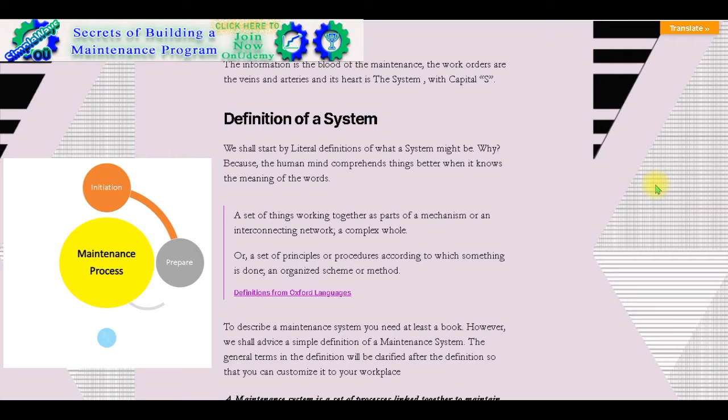That's a system. Also, if we have some procedures that work together to produce an output, they generate a scheme together. So these processes or procedures are called a system. That's the literal definition of the system. So what about the maintenance system? The maintenance system is actually a set of processes. They work together to maintain the equipment with high availability, to work within the designed context, to produce the intended product with accepted quality.

So to understand all this, we need to go through it one by one. Processes: in maintenance we have a lot of processes. For example, we have the initiation process, which is very important. The initiation process is followed by a verification, then the preparation process, followed by the execution process. And after the execution process, we need to give some feedback that helps us in the next initiation. So that's a complete cycle, a complete flow of the blood of information through the maintenance system.

After that, we are speaking about the high availability. In the previous chat, we had spoken about the OEE, or overall equipment effectiveness. It's very important to understand that the availability, or the timeline of the availability, is very important to make the equipment available in a condition to produce the intended targets.

So within the design context: the temperature, the pressure, the speed, the liquids you are using, the utilities you are using, everything should be within the limits of the design. So it's working within the design context. That's the context of any machine: the utility supplies to it, the speed, the greasing, the maintenance. So the maintenance is working to guarantee this context for the equipment to work healthy.

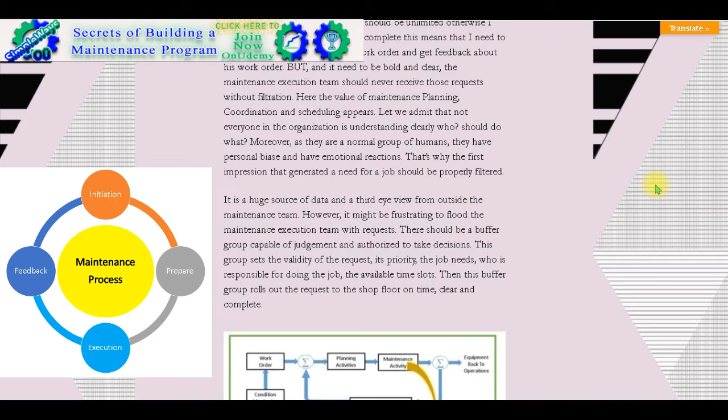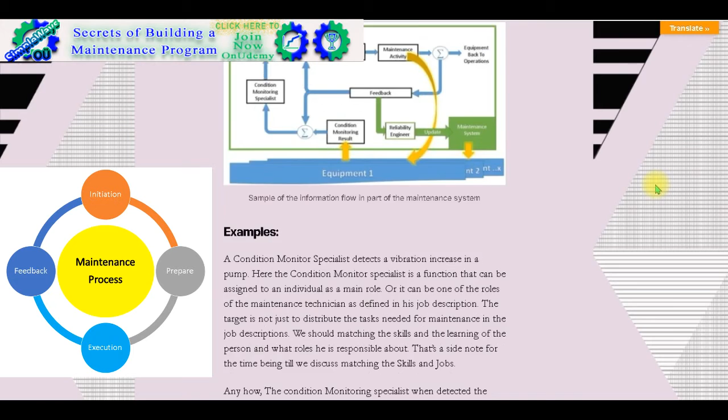Okay, so the initiation is a very important part of our maintenance process, and it's like it pumps the blood inside the maintenance system. And pumping the blood inside the maintenance system can come with a work request, can come with whatever, how you initiate your system. It's coming from the system, coming from a work request, or from an external or from the production, from the operations, from the inspector, the condition monitor. So we can take this example that the condition monitoring specialist, as we said, can be not one person. It can be just a function done by one of the maintenance team or one of the operations team, however you are arranging your system.

And he found that one pump is having a high vibration, or one motor is having a high vibration. Based on his experience and his analysis and his readings, he found that the bearing, or there's a problem with the alignment. So he initiates a request to change the bearing and repair the alignment of this motor or this pump or whatever is the equipment. And this request is taken to the preparation cycle. So the material is prepared, the time is prepared, coordinated, scheduled, whatever is needed is done, and then it goes to the execution after adding all the needed information.

So it's information again. So we have an initial information that initiated the problem or initiated the request to work, and then we have some information that will be added on top of this request, like the safety precautions, the operation interlockings, the bearing change procedures, the alignment procedures, the spare parts needed, availability of parts, availability of manpower, availability of tools, many things you add during the preparation on top of the request itself.

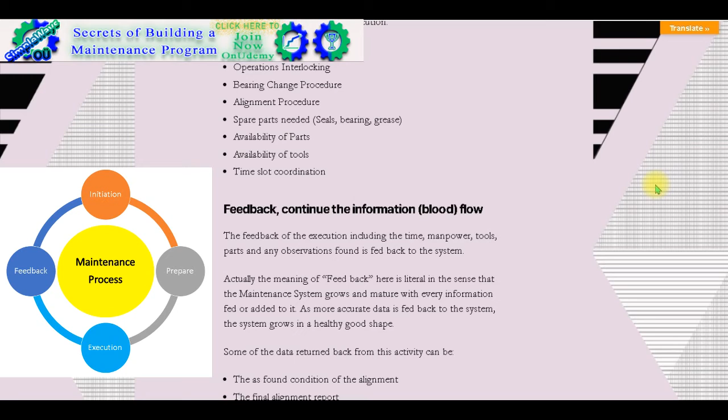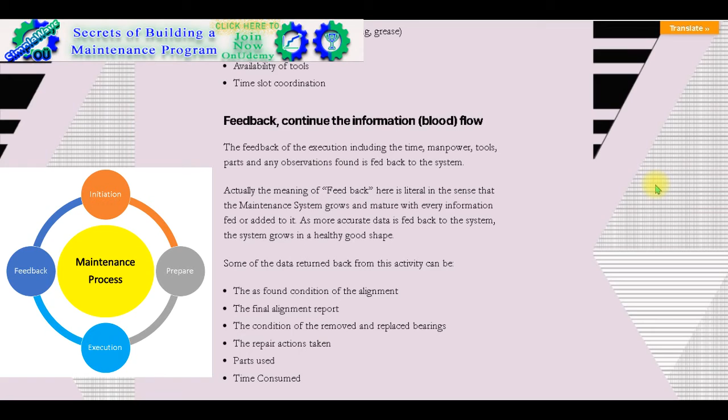After the execution, we have a feedback. This feedback, when it comes back to the system and is recorded, then the next time we are doing the same job or preparing for the same job or having the same job initiated, we have a clue what we had done before, what we are going to do this time, and what went wrong and what went good, so we can do a better preparation or better execution, or even we can reject the job or collect more information about the job because of the experience of the last time. So the importance of the feedback, that's like closing the loop of the information.

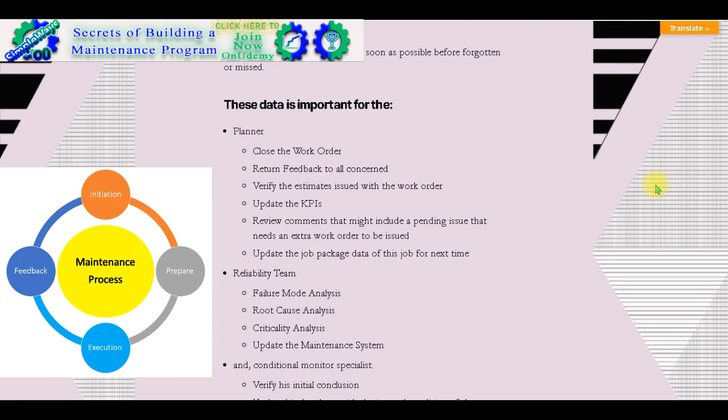So it's important for the planner. The one who planned the job in the first time needs to know the feedback, so he understands his planning is a good one or needs to be modified. It's important also for the condition monitoring specialist, as we had said in our example, that this condition monitoring specialist had made some measurement, made some analysis, and made some conclusion. He needs some verification that his job was perfect. Also, if you have some reliability team or someone responsible for the reliability of the equipment, he will use this data for the analysis of the performance of the maintenance team regarding the times, the root cause, the criticality analysis, and many other things.

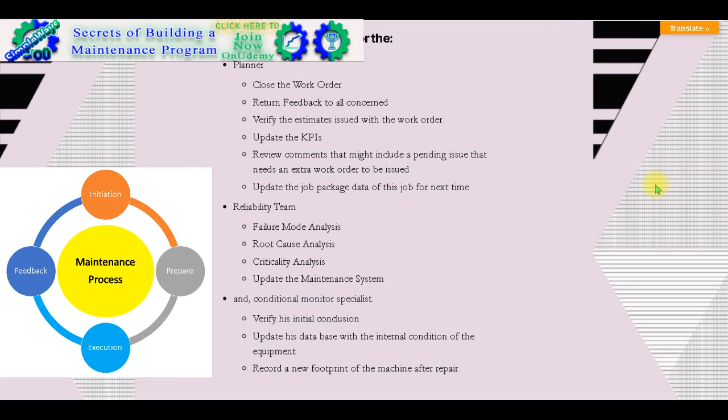I hope that this small insight about the blood that is flowing inside the maintenance system or inside the maintenance processes, which is the information, has drawn the attention to the importance of the information and the feedback within the cycle of the processes of the maintenance. So there's an issue of a task request, there's planning for the task, coordination, scheduling, analyzing of the performance, and continuous improvement by who will receive the feedback, and the added value will be through doing it better the next time. So we need to keep the information, or the blood of the maintenance system, flowing, and to insist on this.